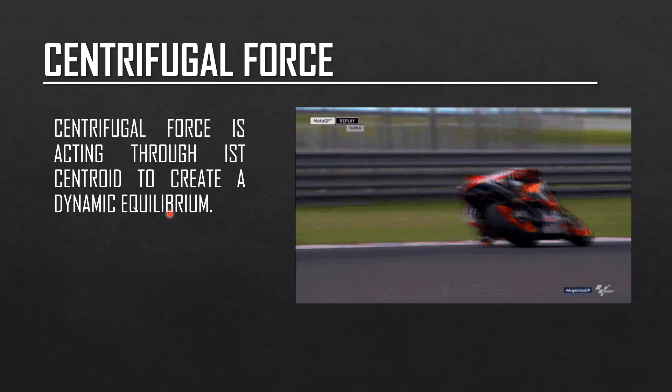Okay, next po, meron po tayong tinatawag na centrifugal force. The centrifugal force is the opposite of centripetal. Ang centripetal is center-seeking. So, yung centrifugal naman po is the force acting away from the center of the curvature. So, the centrifugal force in the banking curve is acting through its centroid to create a dynamic equilibrium. So, ibig sabihin, ito yung counterpart natin na reverse effective force. So, yun po yung opposite ng centripetal. So, that would be the centrifugal force.

So, ano po ba yung centrifugal force? The centrifugal force is the apparent outward force on a mass when it is rotated. It exists when an object is moving in a circular path. So, di ba po, center-seeking po siya supposed to be, so dapat po yung centripetal. Kaya nga lang po, gusto po natin i-analyze po siya as a dynamic equilibrium. So, the reverse of this is the reverse effective force.

So, kung ito po yung ating acceleration, we have the tangential, ito na po yung ating normal. Kasi po, opposite po siya para po maging dynamic equilibrium. So, ito po yung ating normal acceleration, and this now would be the acceleration resultant. So, the normal acceleration, just like the centripetal force, is equivalent to v squared over r. Kaya lang po, opposite po siya ng direction ng ating centripetal acceleration.

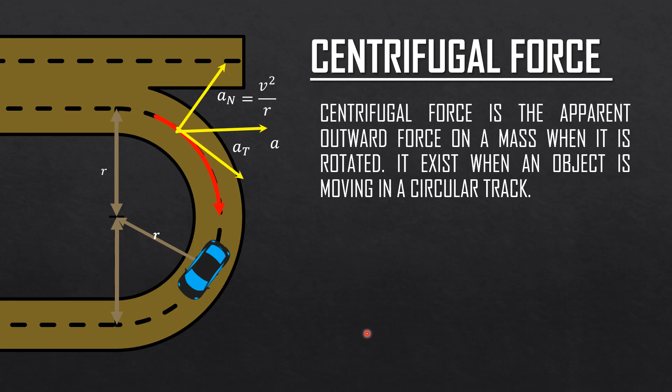So, if you recall the formula for Newton's law, the net force is equivalent to the mass multiplied by the acceleration. We're talking of the centripetal force, so that would be m multiplied by the acceleration. Since that would be the centrifugal force, the acceleration must be in the same direction. So, ang gagamitin po natin is the normal acceleration, which is equivalent to v squared over r.

Now, pag ni-arrange natin to compute for the mass, it is equivalent to W over g, and then v squared over r. So, ito po yung ating mga possible formula for the centrifugal force in terms of the mass or in terms of W and g. So, this is the representation or the symbol of each of the variables that we had used.

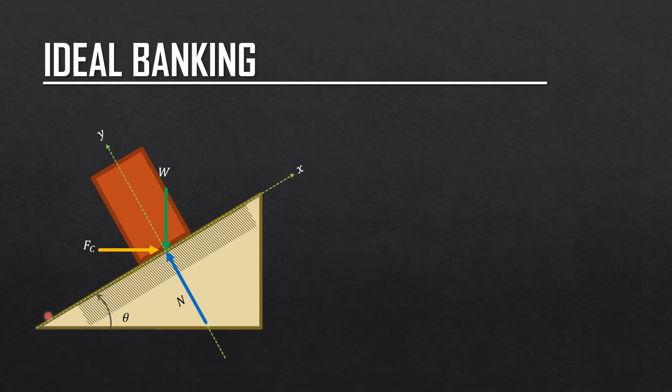It's normal force. Okay? Ito po yung ating magiging Cartesian plane. Along the x po would be the inclined, kung saan po dumadaan po yung ating kotse. So, this is with the inclined road. And then, yung naman po y should be perpendicular to the x. So, neglecting po the frictional force for the ideal banking, wala pong pressure po sa gulong po ng ating kotse if it is traveling in ideal speed or rated speed.

So, if you're now going to draw the force triangle of all the forces acting on the tires, we have the weight, we have the centrifugal force, and then we have the normal force. Okay, if we're now going to determine po, this would be the value of the theta, kung i-analyze po natin yung ating geometry, ito po yan. So, ibig sabihin, kung ito po ay theta, the opposite angle is also equivalent po to theta. Or vertical angle, or opposite angle. So, ito po yung ating theta.

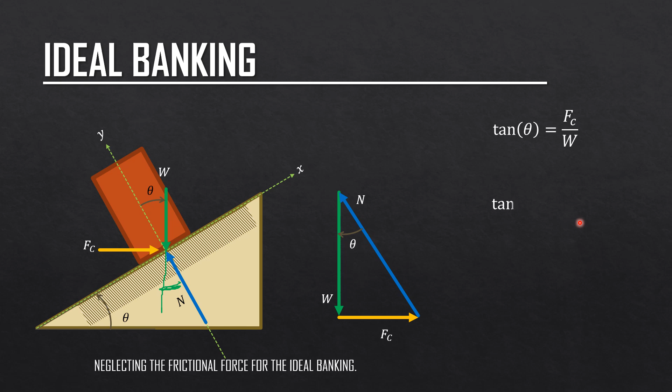Now, let's proceed po. Pag ginamit po natin yung ating trigonometric function, because this forms a right triangle, pag ginamit po natin yung tangent of theta, the opposite side po would be the F sub c, the centrifugal force, all over the adjacent side, which is equivalent po to the weight. Recall po natin na yung ating F sub c can be rewritten as W over g, that would be the m, multiplied by the normal acceleration, V squared over R, all over W. The W would cancel out. So, ang matitira na lamang po would be V squared all over gR.

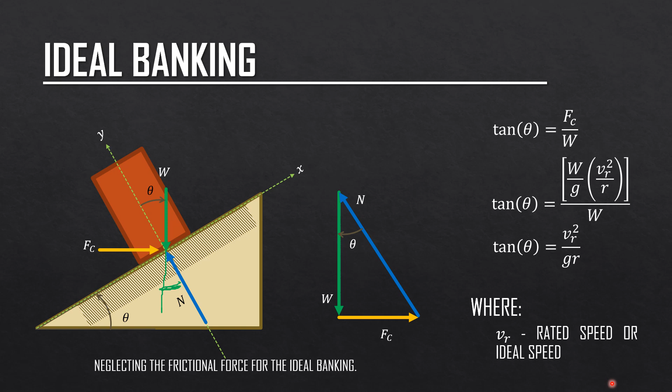Take note po, ideal banking po ito. So, pag ideal banking po siya, wala pong friction, or wala pong pressure po dun sa gulong, at kung wala pong pressure po sa gulong, ang tawag po natin dun sa ating velocity is what we call po the rated speed or the ideal speed.

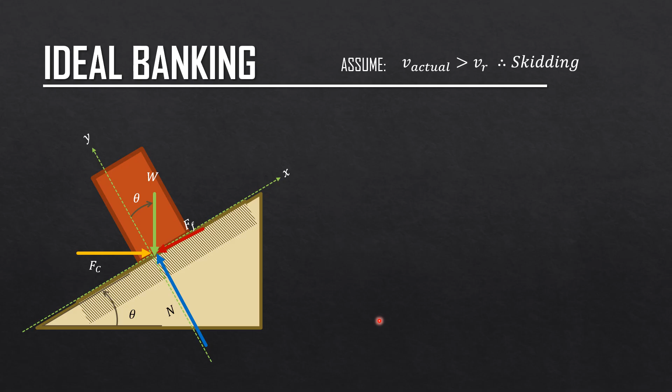So, kung ito po yun, let us now try to analyze po all the forces acting at the tires. So, you have the weight, you have the normal force, you have the centrifugal force. What else? Meron na po tayong friction. O kaya naman po, ang tinatawag po natin dyan sometimes is the pressure on the wheel. We have studied in physics or in statics po that the frictional force and the normal force can be rewritten into one single force. So that would be the resultant.

So susulat po natin yan such that tatlong forces na lang po kasi gagamit po ako ng force triangle. So I have the weight, I have the F sub c, I have the resultant of the frictional force as well as the normal force. Recall po natin na ang formula po natin sa friction po, tangent phi is equivalent po to mu.

So, ito po yung tinatawag po nating angle of friction, yung ating pong phi, and then the mu, that would be the coefficient of friction. The frictional force also has a formula of mu multiplied by N. So, alam po natin yan. Therefore, pag inayos na po natin siya, tangent phi is equivalent to mu.

However po, the mu is equivalent po to frictional force all over the N when you rearrange this one. So, parehas po silang mu. In-equate lang po natin siya. So, pwede po natin din magamit po itong formula na to in getting po the angle of friction. Okay? So, ito po yung ating angle of friction. Ang tawag po natin sa physics niyan is angle of repose.

So, ito po yung ating weight. Okay, what else are acting on it? You have the centrifugal force. And then, supposed to be, ito po yung ating N. Okay, kaya lang po hindi po yan ang gagamitin ko. Ang gagamitin ko po is the resultant po para po mabuo po yung force triangle.

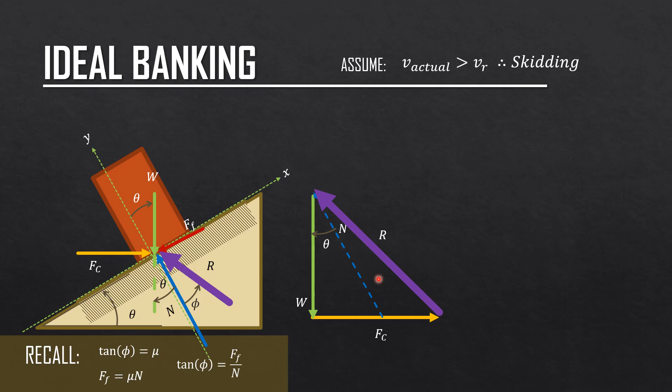Okay? But ang isusulat po natin is the resultant po of the normal and the frictional force, which is represented po as the R. And I have to write the angle of inclination po of the resultant na mula po sa ating normal force. So, that would be equivalent po to the phi. So, ito po yan. Okay?

Now, kung kukuhanin na po natin, this forms now a right triangle, the green, the yellow, and then the violet. So, pag kinuha po natin yan, tangent of theta plus phi, so i-add ko po itong dalawa, is equivalent po to F sub C, opposite, all over the adjacent, W. Substitute ko lang din po ulit ang value po ng F sub C, that would be W over g multiplied by v squared all over r.

Take note po, ito pong v po dito is no longer v sub R kasi po, this is considered already as the actual speed. Yun na po yung takbo niya, kaya po meron po tayo ditong phi. This serves as the pressure po or the friction on the wheel. So, pag sinimplify po natin dyan, yung W po natin ay magka-cancel out. So, the value now for the tangent of theta plus phi is equivalent po to v squared all over gr.

Take note po, yung ating po ditong v is already the actual speed. Okay? And then, the phi po would be the angle of friction. This is the formula na gagamitin po natin pag po yung actual speed is greater than the ideal speed or the rated speed.

Now, assume naman po natin na yung actual speed is lesser than the rated speed. So, ibig sabihin, mabagal. At pag mabagal naman po siya, ang tendency naman po ay mag-slip papuntang pong gitna. Okay? Kung papunta po siyang gitna, let us now try to analyze po kung what will happen po to the formula. What would be the changes po in the formula?

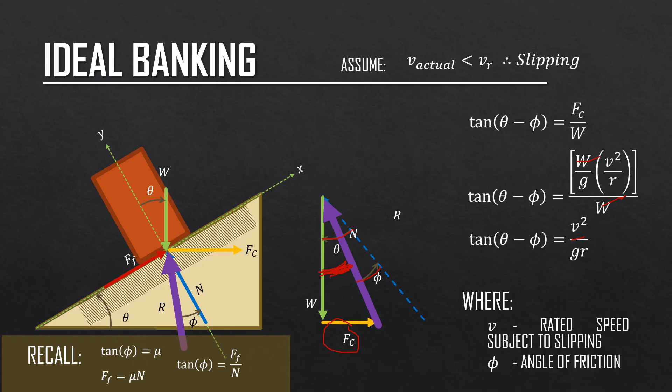Example number 1. A boy running a foot race rounds a flat curve of 50 feet radius. If he turns at a rate of 15 mph, at what angle with the vertical will he incline his body?

So, dito po, yung lalaki, he is running on a certain track, na round daw po siya, flat po siya, so hindi po siya nakabank. Ang binigay po yung radius, which is 50 feet. Ano daw dapat yung angle para po makapag-travel siya ng 15 miles per hour. So, ibig sabihin, this is already the ideal speed para he should be on the track. Hindi naman sinabi na tumatakbo siya ng mabilis. So, ibig sabihin, this is considered as the rated speed.

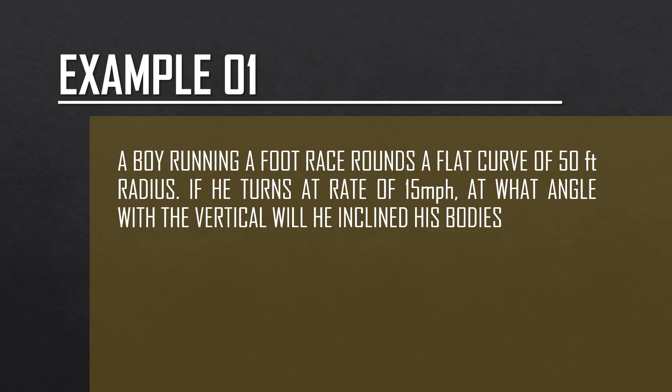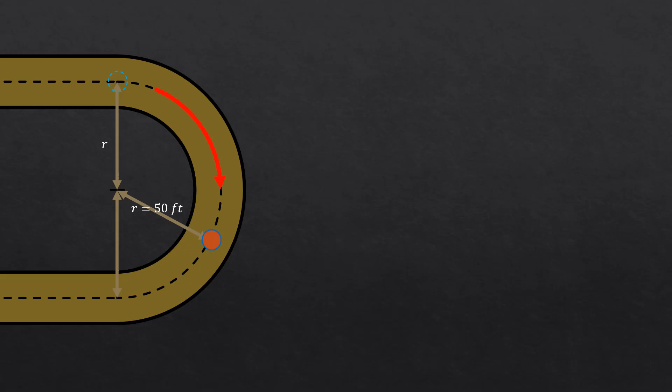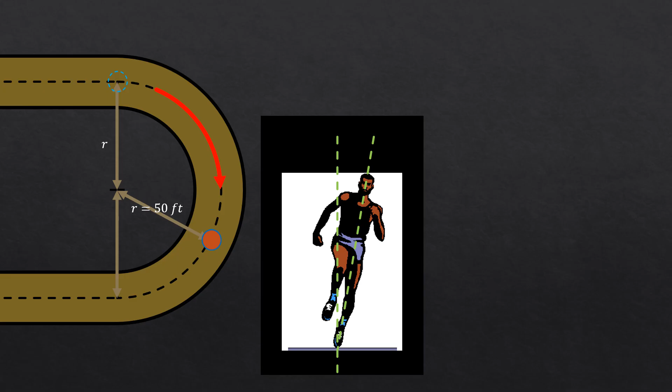Kung rated speed po yan, ito po yung boy, ito po yung kanyang radius of curvature kung saan siya lumalakad na track, so ito po yung ating axis, that would be the y-axis, ito po yung kanyang angle para mag-keep track siya on this particular circular track. Ang kailangan daw natin ay ito pong theta. So for the velocity, that is the ideal speed or rated speed, it is equivalent to 15 miles per hour.

However, dahil gagamit po tayo ng G sa formula ng ating ideal angle, kailangan natin siya i-convert into feet per second. So, pag kinonvert natin yan, magkakaroon ako ng value na 22 feet per second. Take note on how to convert the miles per hour into feet per second. Now, for the angle of inclination, since this is considered already as the rated speed, gagamitin ko yung ideal banking angle. So, tangent of theta is equivalent to V squared all over GR.

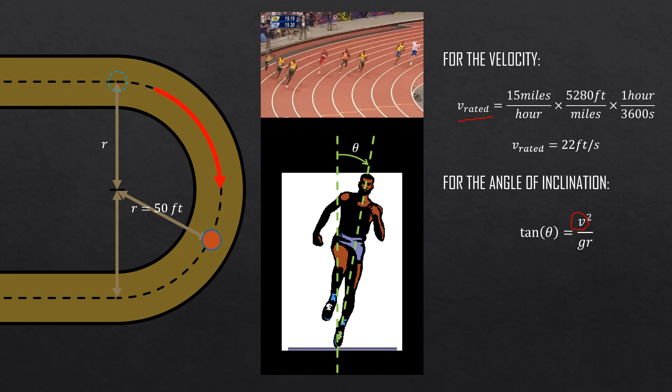So, pag sinubstitute mo na yung ating V, this now would be considered as the rated speed, all over the G, ang gagamitin natin is 32.2, times the R, which is equivalent to 50 feet. So, when you substitute, makukuha ka na ng value na 16.7319 degrees.

Example number 2. The rated speed of a highway curve of 200 feet radius is 30 miles per hour. If the coefficient of friction between the tires and the road is 0.6, what is the maximum speed at which a car can round the curve without skidding? So, take note, binanggit yung rated speed. So, ibig sabihin, ito yung kanyang ideal speed sa pag-travel in a certain curve.

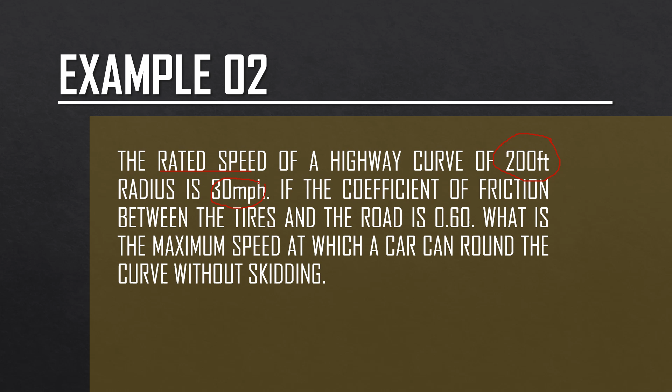Ang radius of curvature ng road is equivalent daw to 200 feet. Ang sabi doon, ano daw dapat yung maximum actual speed para hindi mag-i-skid yung kotse. Okay, so ito yung kotse. He will be traveling at a certain speed, maximum daw, para hindi po tumalsik siya. Ibinigay yung coefficient of friction between the tire and the road, which is equivalent to 0.6.

So, recall again natin yung ating angle of friction, which is equivalent to phi. It can be computed if we know the value of the coefficient of friction. So, pag kinuha natin yan, ang ating angle of friction will be equivalent to 30.9638 degrees. Now, for the angle of inclination, ito ating curve na to. Tangent of theta is equivalent to v squared all over gr.

Ibinigay naman yung ating ideal speed, the rated speed. So, yung 30 natin, that is miles per hour, we have to convert it into feet per second. That's why I have to multiply it by 5,280 and then divide by 3,600. This velocity now, the rated speed or ideal speed, must be squared divided by g, which is 32.2, times the radius of curvature, which is 200 feet. So, may makukuha na akong ideal angle, which is 16.7319. So, ito yung aking theta.

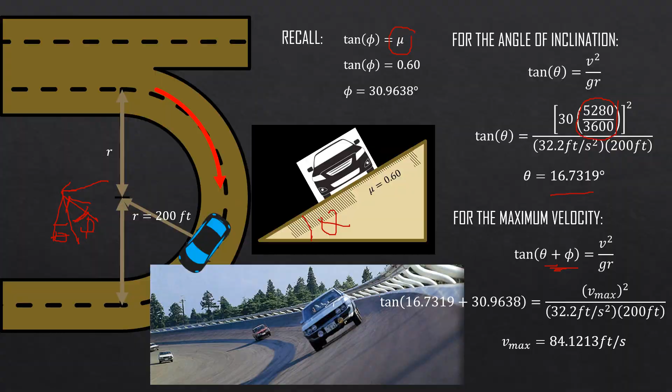Okay, example number 3, the super elevation of a railroad track is the number of inches that the outside rail is raised to prevent side thrust on the wheel flanges of cars rounding the curve at a rated speed. Determine the super elevation E for a track having a gauge of 4 feet 8.5 inches of 2,000 feet radius and the rated speed of 60 miles per hour. What is the flange pressure on the wheels of a 100,000 pound car that rounds the curve at 80 miles per hour?